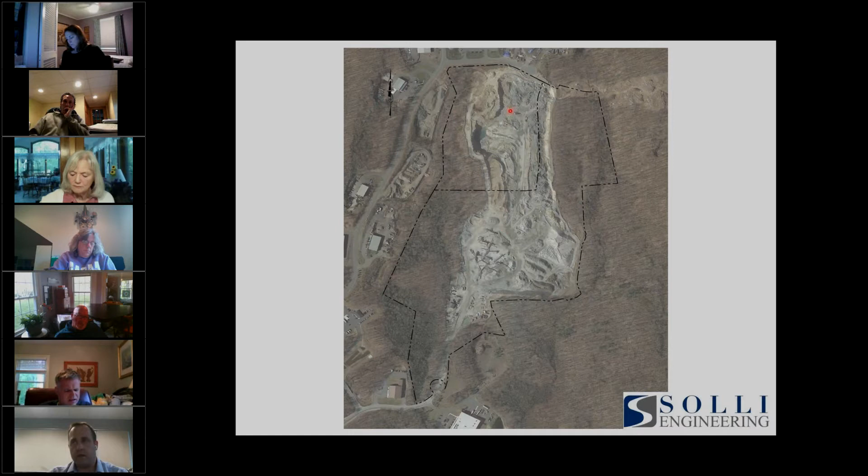So the site has been subject to many past approvals and previous applications. It was originally approved as part of the Pepper Street Business Park, Section 4. That Section 4 re-subdivision was modified recently. But the activity on the site was conducted through a site plan approval which allowed for the construction of 2 large industrial buildings. As the commission's well aware, the activities on the site which were conducted under that approval expanded beyond the scope of what was approved. This commission issued a violation. We came in and reviewed that violation and the activities on the site that transpired. And then we're here tonight to propose a remediation activity to essentially fill in the hole in the area that's been over excavated from the previous approvals and try to restore the watershed to some of the wetlands along the eastern side.

I will say with me here this evening is Bill Kenny, our soil scientist, and also representatives from the applicant team and the property owner. We're hopeful we can keep this presentation succinct, and we're hopeful that this application can be processed in a timely fashion to the best extent practical.

So our application has been modified considerably from the last time we were before you. Some of the issues raised as part of the denial were that the previous application was proposed for regulated activity, and it included the construction of a building. And the concerns were it really should be separated into a remediation application only and not include any other site development aspects. So this plan has been revised to do just that. We aren't proposing the construction of any buildings. We're only proposing to import material and do some grading on the property to essentially get the site flat and stabilized, so it could be used for future development purposes.

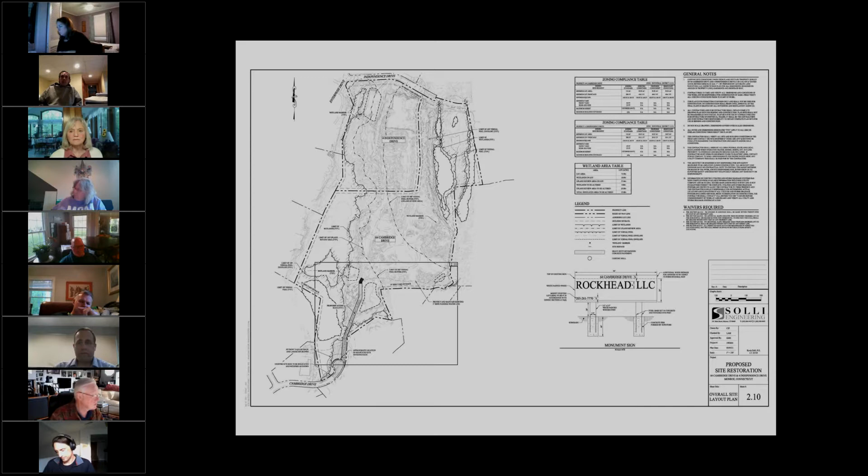Starting at the southern end of the site, we're simply proposing to continue an access drive and a construction entrance. This is actually being done in accordance with previous approvals granted for the Section 4 re-subdivision, which established the cul-de-sac for Cambridge Drive at the southern end of the site. And then the construction of some sedimentation basins and stormwater detention basins, which have been sized and designed to accommodate future potential activity on the property.

From a grading standpoint, we have considerably modified our grading plan from what was previously before you and has been discussed at informal meetings. We are proposing to fill the southern portion of the site, roughly to this location here, to an approximate elevation of 435 to 440, essentially creating a flat level pad, which would extend from this location when you first drive into the property all the way back to this limit here, which would considerably reduce the amount of fill needed to achieve the project's goals.

The northern end of the site on 4 Independence Drive would be filled to a grade of approximately 465, 466, which would allow for a watershed to be recreated to feed into the easterly wetland systems, which is roughly equivalent to the watershed that was previously approved by the Planning and Zoning Commission. In the previous denial letter, there was discussion about an alternative that didn't restore the entirety of that watershed. We believe this application addresses that concern.

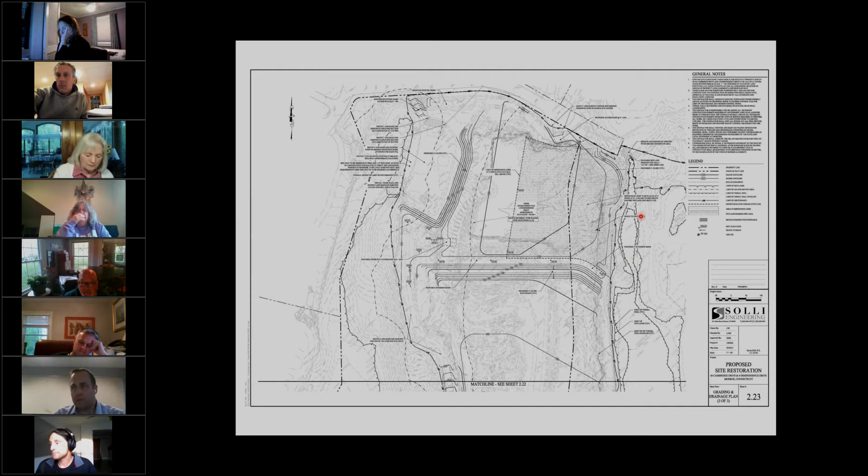Continuing north into the site, as I mentioned, we're just grading this out to create a somewhat level pad, but to make sure there's positive drainage all the way towards the front of the site. And then once you get to the northern edge of the property, the portion of the site closest to Independence Drive will be filled to an elevation that'll allow access from Independence, and then have stormwater drain superficially to the east to provide some watershed restoration, and then a 3-to-1 slope down from this level pad to the lower pad.

As part of our application, we included details for an impervious clay liner, and actually it can either be a clay liner or a 6 mil poly or plastic liner, to ensure that any water that does rain on this area of fill will essentially infiltrate into the ground and then drain along that liner to this wetland edge, along the existing rock face along the eastern side, so that we wouldn't lose any of that water from a watershed standpoint. This was discussed at length, and we feel that is a good way to address that. It'll essentially act as the rock ledge elevation did prior to any site disturbance.

Our soil erosion sediment control plan has been prepared in accordance with the 2002 Soil Erosion Sediment Control Manual. This site is covered under a stormwater general permit for construction activities with the DEEP. It's also covered under an industrial permit for stormwater discharge from industrial activities, also under a permit with the DEEP as well.

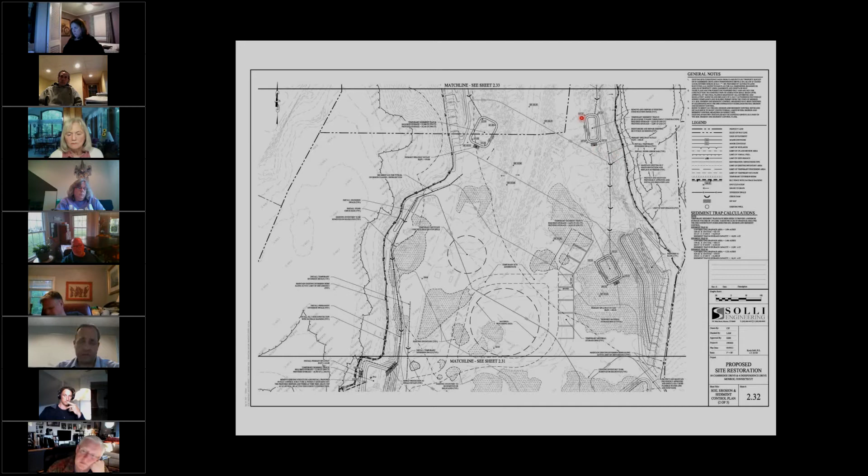As you can see here, we've identified on the SEC plan where the material stockpiling would take place, and how the existing on-site materials would be gathered and then placed. We have a series of sedimentation basins which have been sized in accordance with the SEC manual to ensure there's adequate capacity to collect stormwater runoff and adequate room for sediment to settle out.

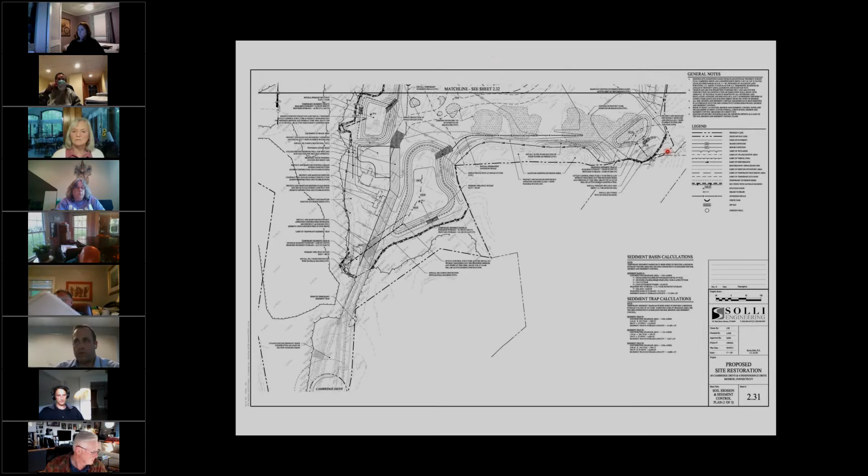The northern portion of the site, as I mentioned before, has the deepest part of the hole. From a dewatering standpoint, we will be proposing for that water to be dewatered into the sedimentation basin in the southeast corner in this location here, so that it doesn't inundate the westerly wetland system or vernal pool, which I think there may have been evidence of in previous years when that water was dewatered into the municipal basin in the northwest corner of the site. So we'll be providing dewatering to this corner to ensure that we don't have any adverse impact to those wetlands or natural resources.

Included in our package is a robust landscape plan, which includes extensive both wetland plantings in specific areas and also upland enhancement areas. Starting on the southern end of the site, we've included, for the Commission's information, some remediation and restoration plantings, which are approved as part of the Section 4 re-subdivision at the southern end of the site where Cambridge Drive cul-de-sac will be reestablished.

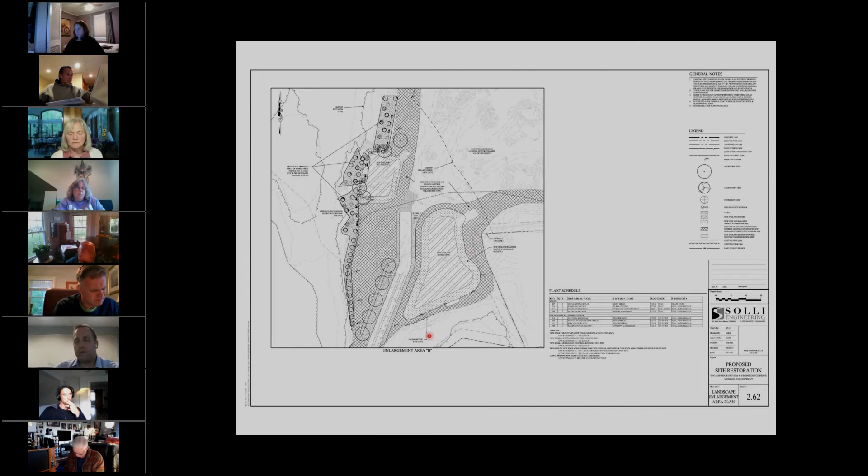As you drive north into the site, our access driveway in this location here, we have extensive wetland plantings and mitigation areas and upland enhancement areas along the eastern edge of the site. Included in our package is extensive wetland markers along the boundary of the property to ensure that it's very clear where the wetlands are, the natural resources are, to protect against any future disturbance in areas where we don't want that disturbed. We have seeding mixes in the detention basins and sedimentation basins proposed on either end of the driveway.

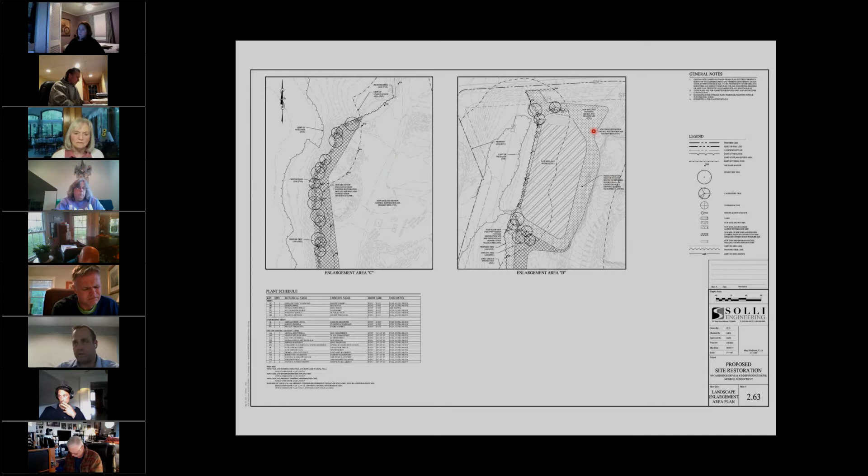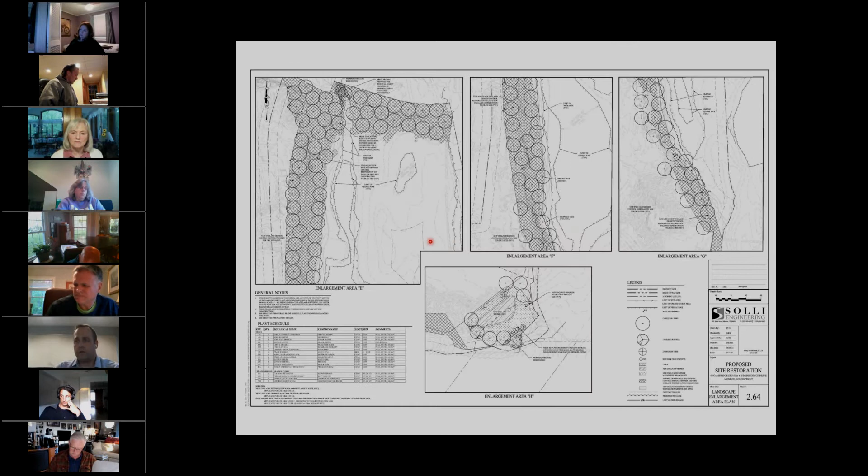As you continue to drive north along the western side of the property, we have additional plantings and upland enhancement plantings along the eastern edge of the wetlands. And then in the municipal detention basin, which is located in the northwest corner of the property, additional plantings, both from a seeding and also from a plant standpoint, are proposed surrounding that basin. Going back to, and sorry to jump around, but in the southeast corner of the site, our sedimentation basin and stormwater basin has been designed to also provide for some additional wetland plants and upland enhancement areas.

We've also identified a small area in the northeast corner where we're proposing to actually recreate some additional wetland soils with additional wetland plantings in this corner here. And then as you continue further north along that easterly wetland edge, we've provided some considerable upland enhancement plantings, upgradient from the wetlands, and then some extensive tree cover to restore the previously cleared area north of the wetlands and Vernal Pool in this location here. And then those buffer plantings continue as you go from north to south along that wetland edge, and then additionally through this area, bringing it all the way back to the other corner.

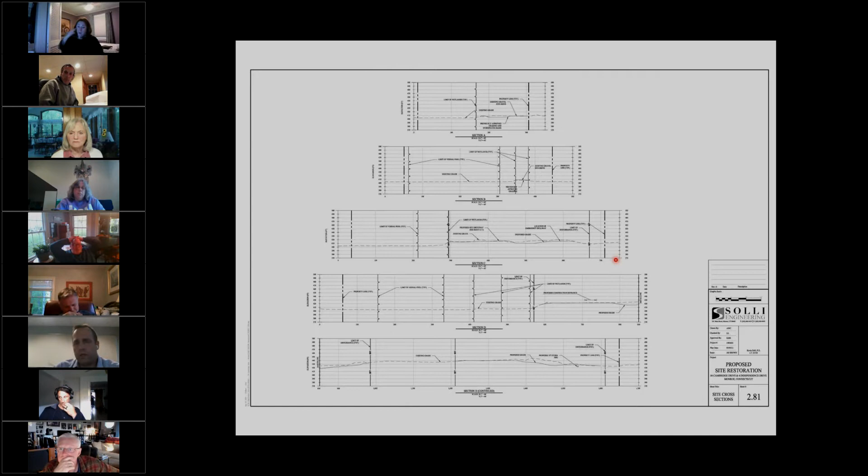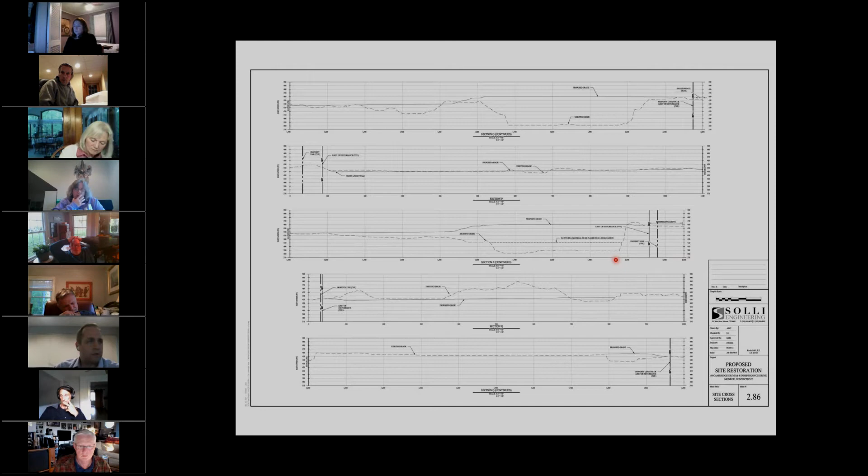We have in our package sections through the property which show the existing grades and the proposed grades. This is actually more of a requirement for planning and zoning with their fill permit, but it is something that we had prepared. What I wanted to do for the commission's benefit is to show some 3D models, which may be helpful in the commission understanding what the proposed grading will result in from a future condition standpoint. So this obviously shows our proposed grading activities.

One other consideration that we've included in our application is a proposed lot line revision, which will result in moving the existing lot line between 64 Cambridge Drive and 4 Independence Drive from this location here, moving that line a little bit from south to north to bring that line across the property here so that it essentially bifurcates the upper pad and the lower pad, and then have that line continue south so that the entire limit of that easterly wetland system will be contained on 4 Independence Drive, so that the watershed that's being restored is entirely on 4 Independence Drive, and the wetlands on this side are also on that property.

So this will allow for essentially 2 properties, 4 Independence at that upper pad elevation with access off of Independence Drive, and then 64 Cambridge Drive developed to that lower pad elevation, so that they can be developed independently, but the restoration activities associated with this easterly wetland system are all fully contained on one property. We know that was a concern discussed during the previous hearings.

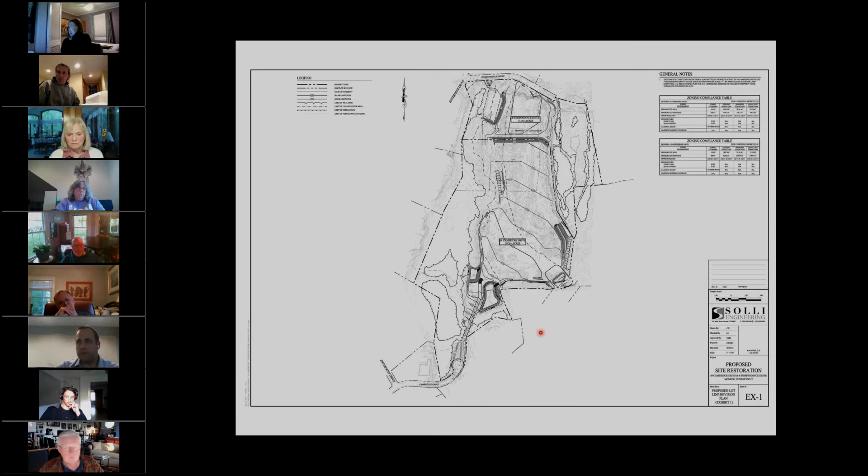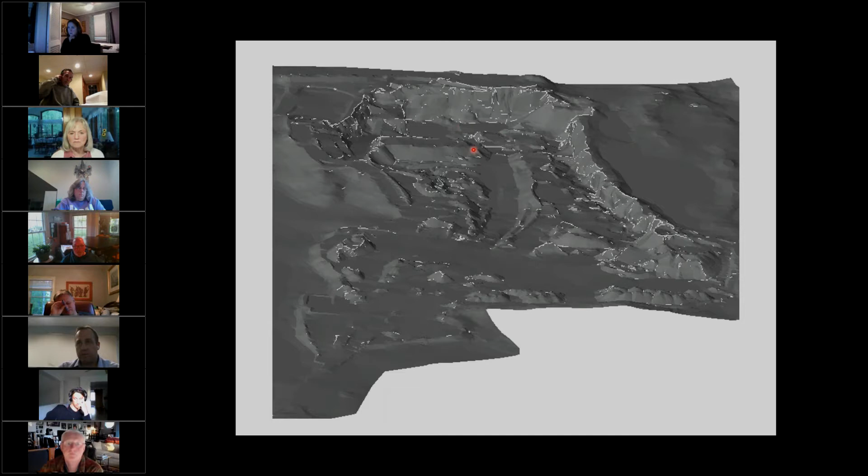And then I wanted to show some models. I think these might be a little bit hard to see, but imagine you're up in the air roughly here, looking to the north towards Independence Drive. Up along the eastern side, you can see this would be that easterly wetland system. You can see the face of the rock excavation, and you can see how the grades drop down. Independence Drive would be roughly in this location here. You can see that face as it drops down from higher elevation to the bottom of the excavation here. You can see some stockpiles of materials which have been created over the years, and just how those grades work.

And then from a proposed condition, we do have a model which shows how this will be cleaned up, and roughly we're going to be able to create a uniform grade running from south to north, all the way to that proposed change in pad elevation with the uniform slope up to that upper pad elevation.

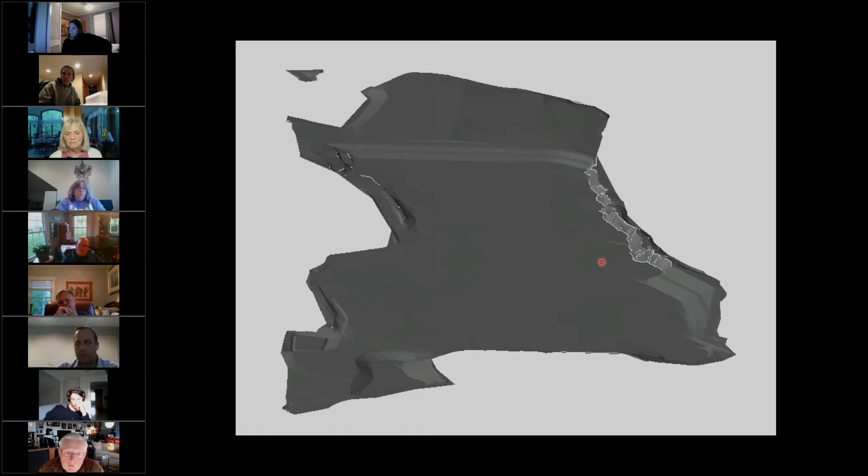And then again, this will allow for surface water flow from west to east to fill into that easterly wetland system here. You can see the height of that easterly rock face has been reduced substantially from its current condition as we fill in this lower portion of the site up to that lower pad elevation.

You can even see the depressions for the detention basins as we've proposed it along the southern end of the site and the driveway coming right through the middle, to really create an area that can clean up something that's needed to be addressed. And again, we're here with the property owner with all intentions to address that. And I think we've been trying to be open and honest and work with the commission in earnest to get this property to be addressed.

With that, I guess I'll pass it over to Bill Kenny. Included in our application materials was an updated report from Bill's office. He's been out to the site a couple times, and I wanted to give him a chance to address the commission to talk about his review of our proposed plans and his assessment on the wetlands and how this activity will prove to be a net benefit for the property. And then we're happy to answer any questions the commission may have.

Bill? Yes, good evening. My name is Bill Kenny. I'm the principal of William Kenny Associates in Fairfield. I am a professional wetland scientist, soil scientist, and landscape architect. We continue to help with this project and are happy to be here for the proposed remediation work.

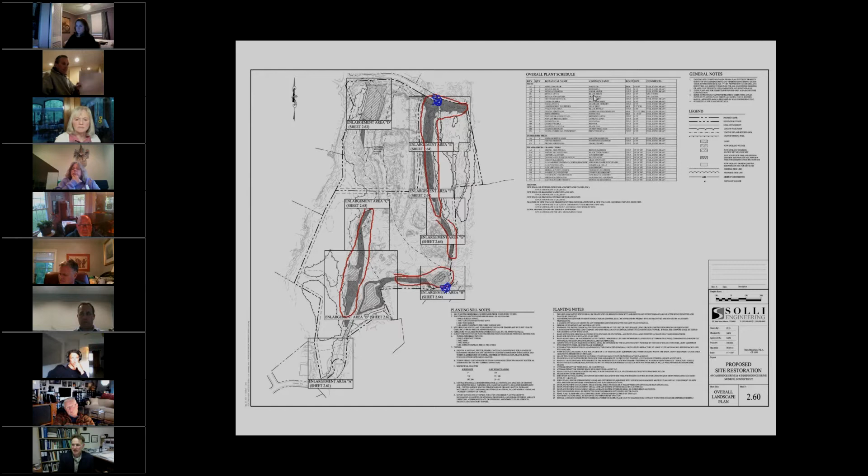Thanks, Bill. I believe that Keith Romano came to the meeting at 7:25. Am I correct on that, Keith? Oh, yeah, around that time. It's around 7:20, 7:25. 7:22, actually. 7:22? Okay. Cool, I didn't even pay attention. Keith, I wrote you down. If you want to take over, you're welcome to do so. No, go ahead, Lois. You could keep going. But I do have a question. I'll start with a question, though.

Sure. First of all, let me ask, how much of the presentation did I miss on this application? Not very much, I don't believe. Kevin did an overview, his normal overview. And at what point did you come in? Kevin was speaking. It seemed like it was early on. I know I wasn't there for the actual opening of it. I guess we'll go back and check the record afterwards or the tape. Keith, I think when I saw your screen pop up, I had just really started talking about some of the history to refresh the commission's memory, although I know it's probably very clear in everyone's mind, and the length of the discussions, and that what we brought before you tonight, we think adequately addresses a lot of the concerns raised from the previous application. And then we just started to run through it. I don't think you missed very much.

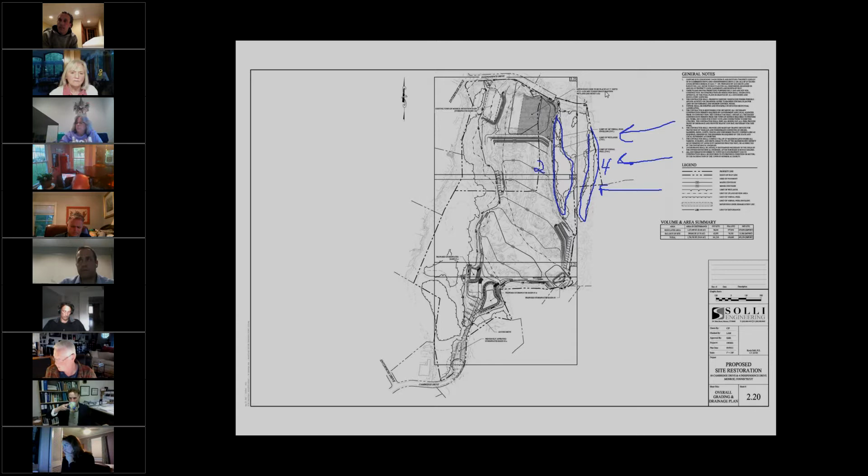Ross, you said you had a second question? I did. The planting plan that's going to be in the impervious liner area. Are the trees, like, what is it? You said it's going to be a 3-foot depth of material on top of the impervious liner. So if you're going to have some large trees planted in that area, how are the roots going to deal with that?

The vast majority of your roots, when you go out in the forest and dig a hole, particularly the larger ones, they're within the top 2 or 3 feet of the soil surface, and they really spread primarily horizontally. You'll get some smaller roots that'll go deeper, but it's quite similar to conditions that existed before, where there was bedrock close to the surface, so a very similar situation for growing. Okay, thank you.

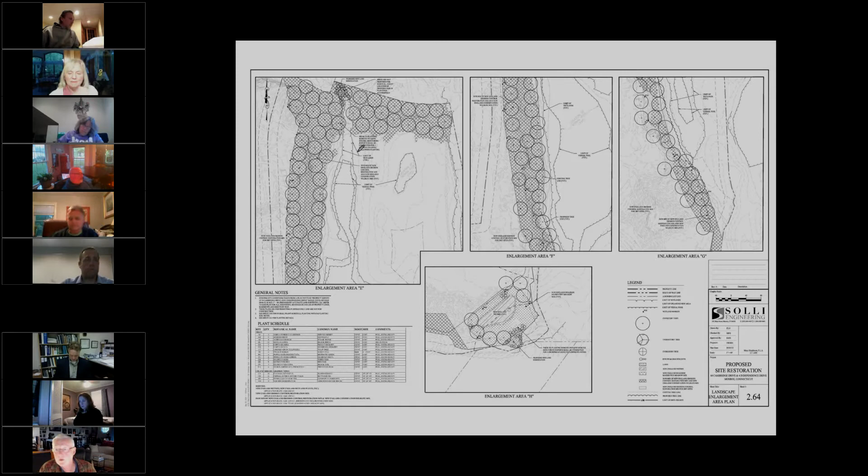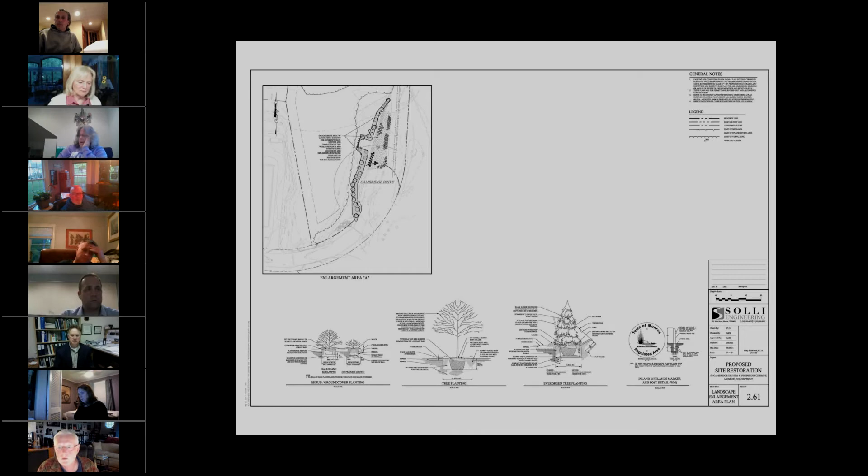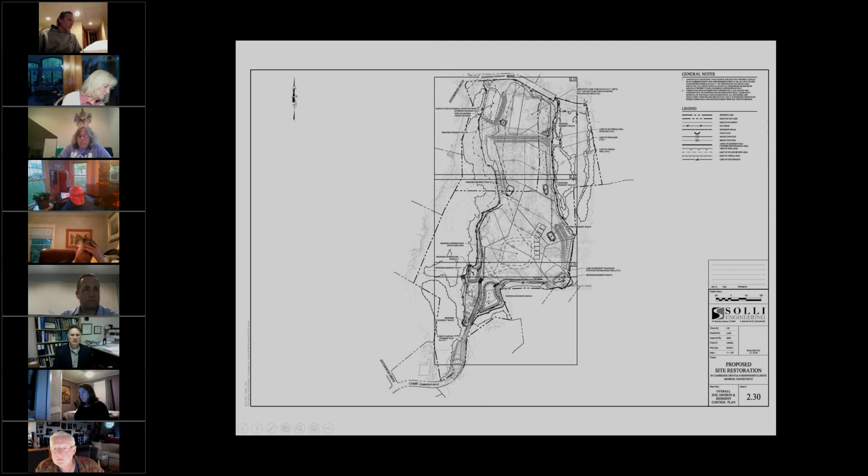DJ, do you have any questions? Yes, I do. Kevin, if you could go back to the previous slide there, the 2.20. Okay. Sorry, one second. Here we go. That's the one.

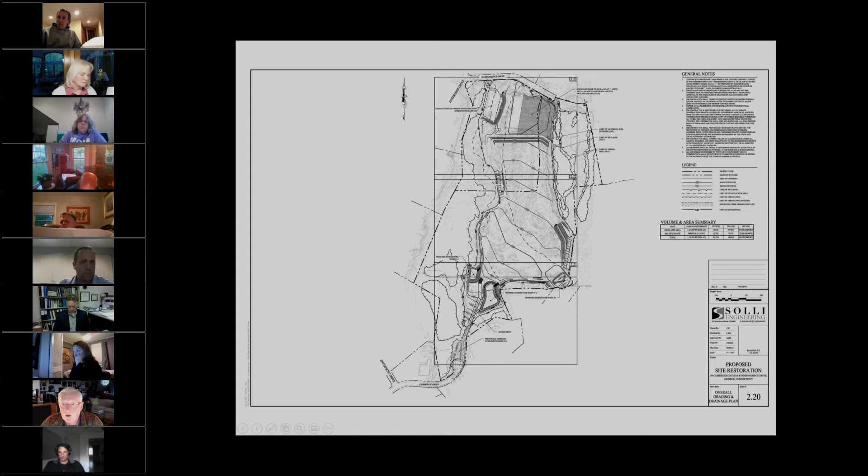Okay. So up there at the top, around that impervious liner, it appears the liner crosses the property boundary. Is that correct? That property boundary is running vertically through the impervious liner? It crosses the current configuration of the property line. And let me pull up, because I think it's a perfect time to do that. This is our proposed lot line revision plan, which moves this property line to come in this configuration.

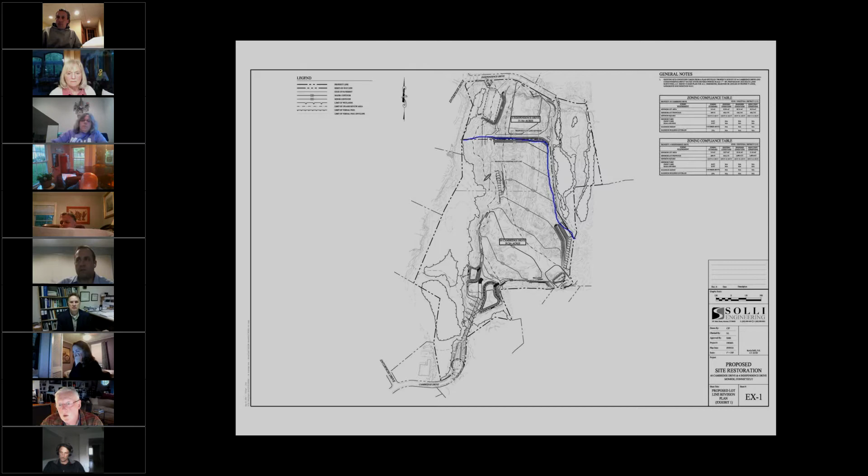So you can see very light, and I'm going to trace it in a different color. This is the existing property line, which I'm drawing now in green. The blue line represents our proposed property line. So the entirety of this upper pad area will be entirely contained within 4 Independence Drive, so that liner will now be located entirely on 4 Independence. Circle the rest of the property for everyone. So all of the restoration goes with 64 Cambridge.

Well, the blue is 4 Independence. Oh, okay. So all of these wetlands and all the grading will all be established on 4 Independence, and 64 Cambridge will essentially be the lower pad area. But all the water for the restoration of 4 Independence comes from 64 Cambridge? No, the surface water is coming from that. Oh, the well pumping I'm talking about. Yes, the well pumping does come from 64 Cambridge.

Okay, so even if you separate the properties, there's still a huge interdependence for the restoration between the two properties. One thing that we could do to address that: we wanted to get the rehydration started immediately, so we wanted to use the existing well that was there. We could incorporate into this application, if it would please the commission, another well up here on 4 Independence and pump from this well in the future. I think the applicant would be happy to accept that as a change to the plan, so it's all entirely captured from 4 Independence

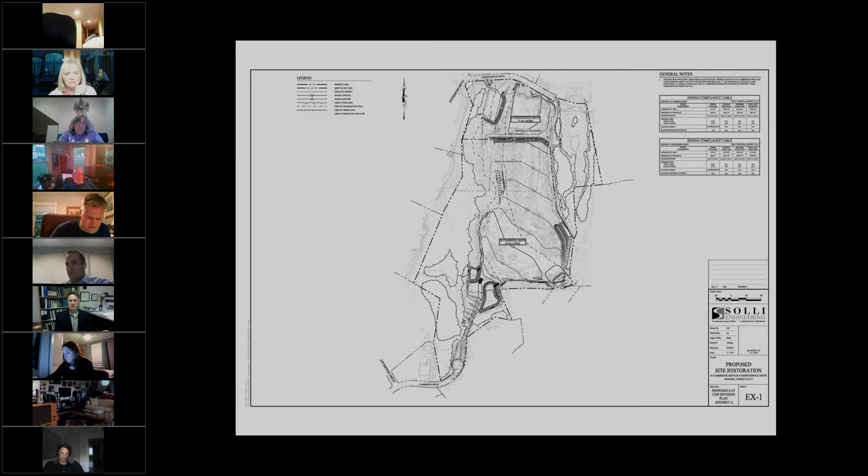Okay. I got a question about your upper pad there you're making. So you're going to be filling different materials, maybe to fill within the vernal pool envelope, and this is above the liner, and then you fill outside the vernal pool envelope, but still graded towards the vernal pool. Can you show me where that vernal pool envelope is on the drawings?

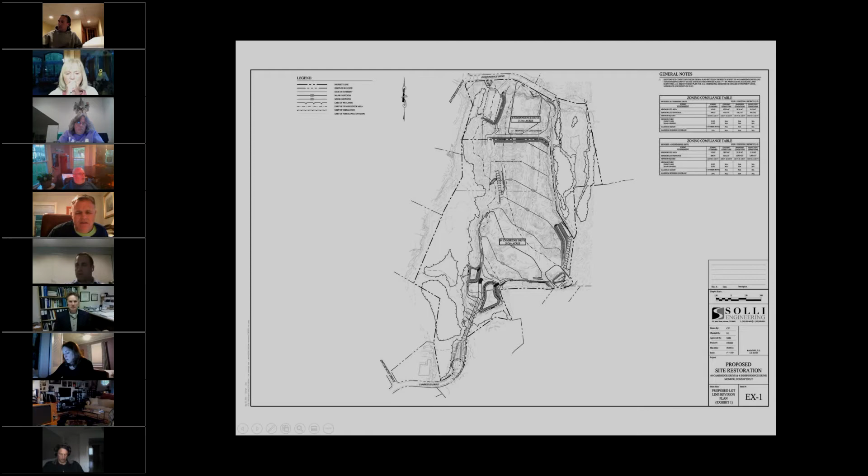I can. Let me go to our close-up in that area. How we're defining that vernal pool envelope? Sure. The vernal pool envelope is essentially a 100-foot buffer from the limits of the vernal pool. These vernal pools were flagged back in 2014, so obviously nature has changed, but we've used that same envelope. And that roughly follows this location here.

Now, in previous applications, we had proposed, obviously, to fully restore it to the southern end, but since the change, we're obviously only proposing to do that filling through this limit here. But that's roughly the 100-foot buffer which represents the vernal pool envelope from this vernal pool. Okay, so I didn't see that notified anywhere that you were considering the vernal pool envelope at 100 feet.

Then the other thing you've got is you also talked about a 6 mil liner as opposed to, I guess, a 6-inch thick clay. Yeah, our initial application said it could be either or. I think during the last hearing, we received some feedback it would prefer not to be clay. We think either can be successfully implemented here. But it would be that.

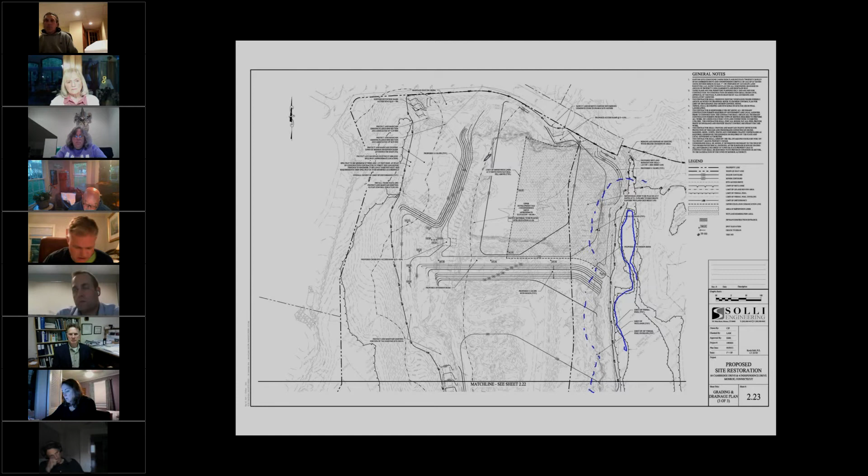Then the next question was, since this is going to be a future pad site, with buildings and asphalt and curbing and drainage and septic systems on that pad site, can you explain how you're going to treat the stormwater runoff that's heading to that vernal pool in the future, if this is permitted, in either 3 feet of natural fill or 6 feet of clean fill? To me, you're going to need more depth to create a pond or something, and piping. I just don't understand at this point. And I don't necessarily expect you to answer right now. It's just the thought.

Well, ultimately, we're establishing the limits of this impervious liner, but in a future development application, a portion of the surface will be impervious. Whether it's roof or pavement or parking lot, the water that lands on those impervious surfaces will be collected and run through a treatment train to provide water quality treatment, and then likely through a hydrodynamic separator or an above ground basin to ensure we're meeting the requirements of the water quality manual.

So, in theory, if we have a development pad with a building facing Independence Drive, we would collect all that and route it through a stormwater treatment train with deep sumps, so all that area would be collected and treated. That may be attenuated either through underground detention or an above ground basin. All this actually drains to the Great Pine Swamp and then runs to the north, so we don't have an attenuation requirement because the swamp itself does that attenuation. From a septic standpoint, the septic soils would be over on this side, where there's been some septic testing with the sanitarian. But all this area could be collected and treated.

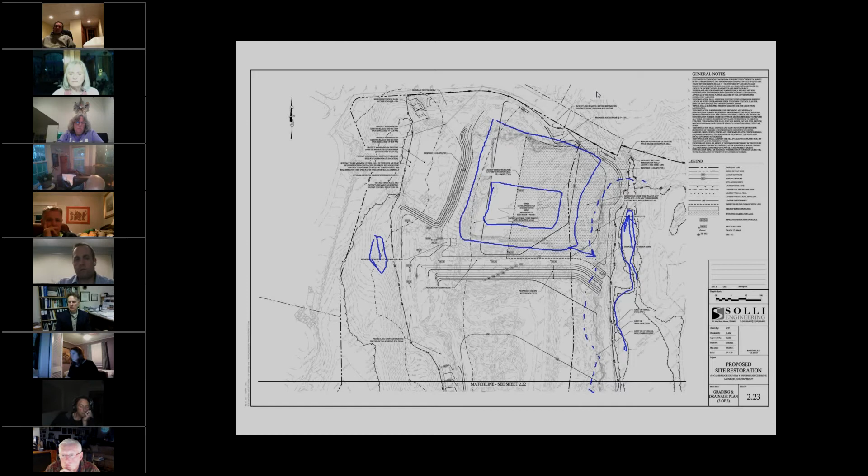Yeah, and it's treated, because I don't want to have an argument in a couple of years when you've got a developer and we're saying, you can't make the site work, we have to dig down and relocate the liner and do all this. Sure. Yep. Okay. We can provide that. Okay, thank you. That's good, Lois, for me for now.

Okay, thank you. Clark, have you any questions? No questions. Okay, guess who's next? You are. As usual, I have a whole mess of questions.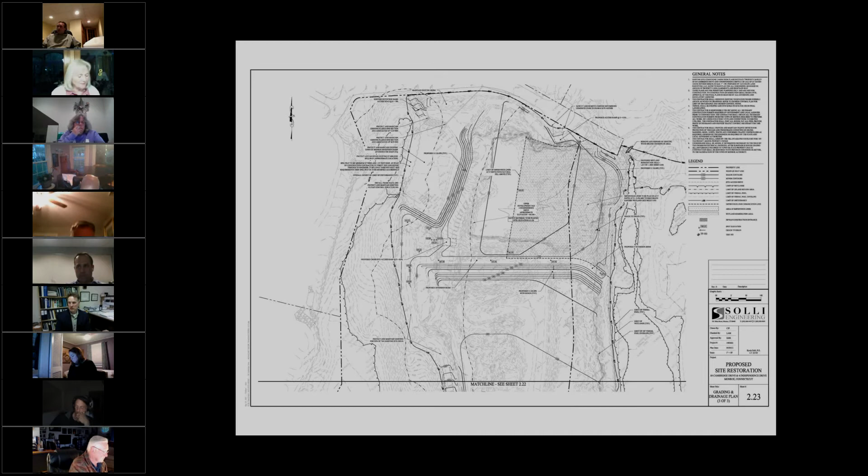The new proposed activity and the new proposed lot lines that you brought to us this time are quite a bit different than the ones you showed us in the concept when we brought it to the informal discussion, and the east-west line that transects has been brought toward Independence Drive significantly.

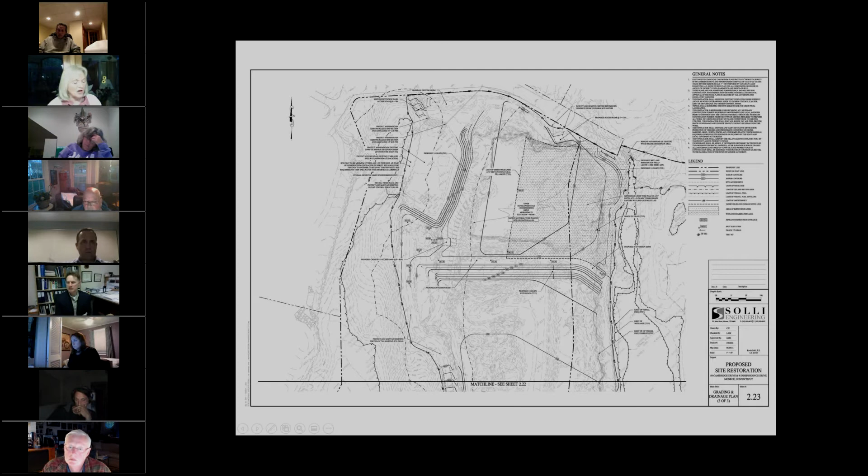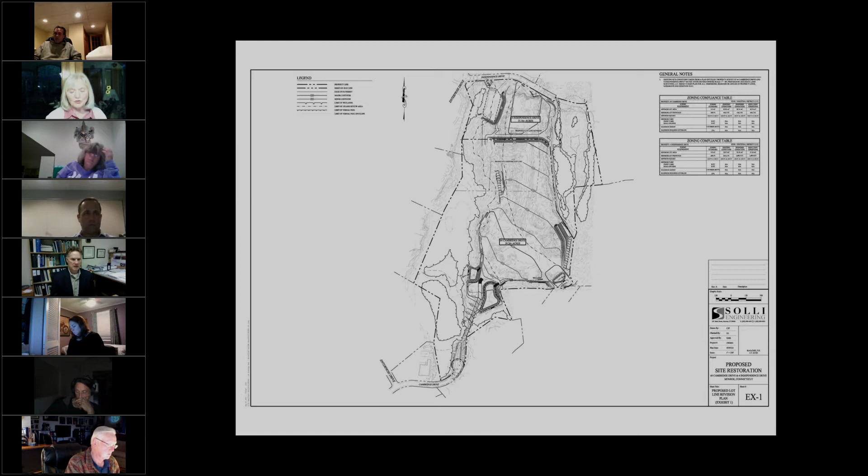The first question I have for Bill Kenny is, Vernal Pool 2 is in the larger section of wetlands, not the one that's directly east of the liner on Independence. It's south of that, am I correct? That's correct. So there is no vernal pool that's being directly fed by this runoff.

No, there's a small area of breeding that was found just on the north end where Kevin was just starting to outline. But that's never been identified as a vernal pool before. I believe it was by Michael Klein. It was flagged as a vernal pool. But it was never in any of the previous applications or discussions. Vernal Pool 2 was always in the northern section.

I'm sorry, I keep saying that. In the southern section, the larger of the two. And Vernal Pool 3 is the little isolated one in the far east. My concern is that there's not going to be any runoff going to the majority of that wetland, which is actually south of the area where you're proposing this drainage pattern. I just want to put that aside as a concern for now, and we'll probably revisit that at another time. Are you planning on this pumping being a permanent thing?

Oh, this plan, so I'm looking at Exhibit 1. It's just called EX1. The lot line, the elevations don't match with the elevations on. I'll be honest, I got home late yesterday afternoon. I have not had a lot of time to spend on this application, which was in my mailbox when I got home yesterday. So I need more time, obviously. But there seems to be a little bit of a discrepancy in elevations in one set of plans to another. I just wanted to mention that. Yeah, please, once you have a chance to review, please let us know if the current application has any plans that are inconsistent. Will do.

Okay. At what point in the program would you be revising the lot lines? We're proposing it as part of this application. We propose it as part of our planning and zoning fill permit application, provided that the Planning and Zoning Commission approves our fill permit. We would then file that lot line revision on the land records prior to the commencement of all the activities. Okay, and you're waiting for approval from us before you go to P&Z? Yes, we're trying to avoid long protracted discussions in two commissions at the same time. We'd like to go to the Planning and Zoning Commission with something that's been endorsed by this commission. Okay.

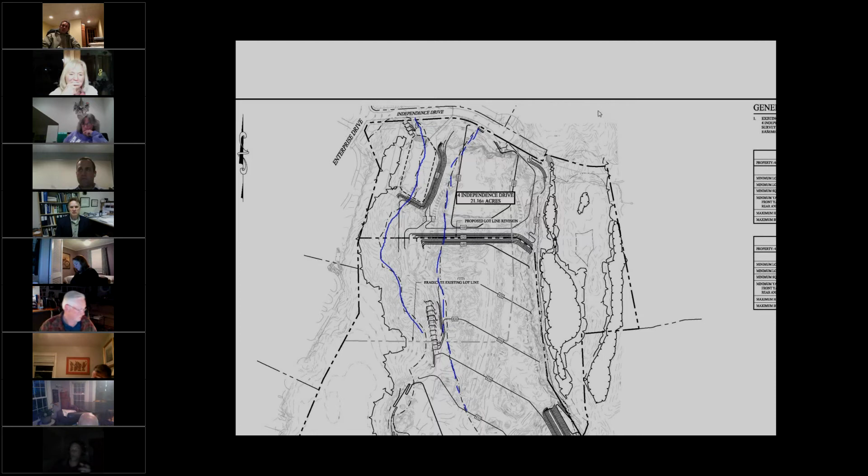Well, we probably end up doing something with solar powered, because essentially it's an irrigation operation. Yeah. And we've actually done some sourcing of some pumps that could be fed by solar power. So we wouldn't have to run permanent power to it, and it could be served that way. Okay, because I was also thinking if he were to put it there, for long-term purposes, wouldn't it make more sense?

And maybe I'm just thinking too much, but to have it closer to Independence Drive for servicing and whatnot. Because how are you going to get to it later on if you had to do a service to it? Not that I think this thing's going to have to run forever, but if that's what you're proposing, I'm just thinking to myself, that's pretty damn far away if you have a split up property and they've got to get to it.

And also not to mention, it's basically an irrigation system, like you said. In the future, why wouldn't you maybe tie it into city water and just not worry about a pump? We could certainly look at that. I think we'd have to, and that's something that could actually get incorporated into any future site development here. Yeah. On 4 Independence, that could actually be captured in. I think that's actually a great suggestion.

We could work that into the irrigation system and then run those continuous lines down along the property line to further hydrate that southern end if it's needed. I think the beauty of this is we have flexibility to consider that. But we're incorporating those remediation methods in this application now, and we can always revisit and adjust as needed. But I think that's a great suggestion. Okay, that's all.

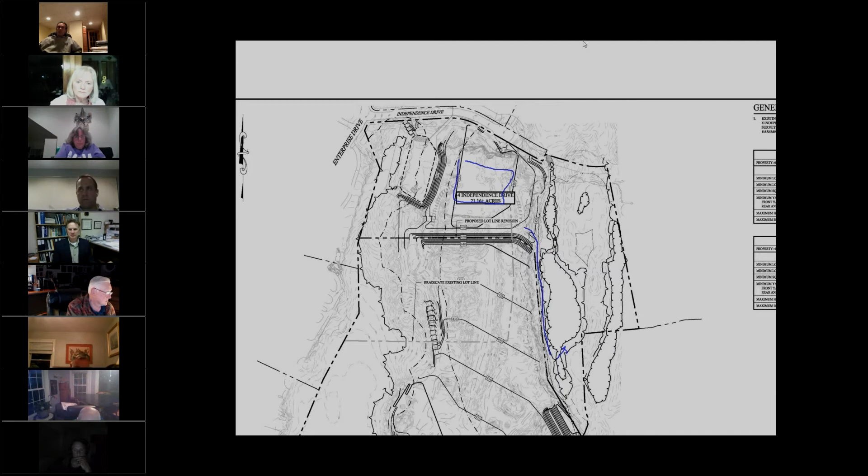Hey, Denise, do you have any comments? No, I'm gonna stay out of this right now, because any changes I won't be around for. Okay, thank you. I mean, a lot of the questions I had, you asked, some of the other commissioners asked. Okie dokie. Okay, any further questions from the commission? Anything? Ross? No, okay. DJ's good, all right, looks like everybody's good.

So I would like to table this, not application, this submission to the next meeting, pending. Is Scott, the engineer, going to weigh in on this? He has not had a chance to review this yet. There was a lot of information. I'm sure he'll have something by the next meeting, but he hasn't had a chance as of yet. I certainly understand that. Okay, all right, so pending. We'll continue to the next meeting. I would like to table this to the next meeting. Okay. Thank you, everybody. Thank you.

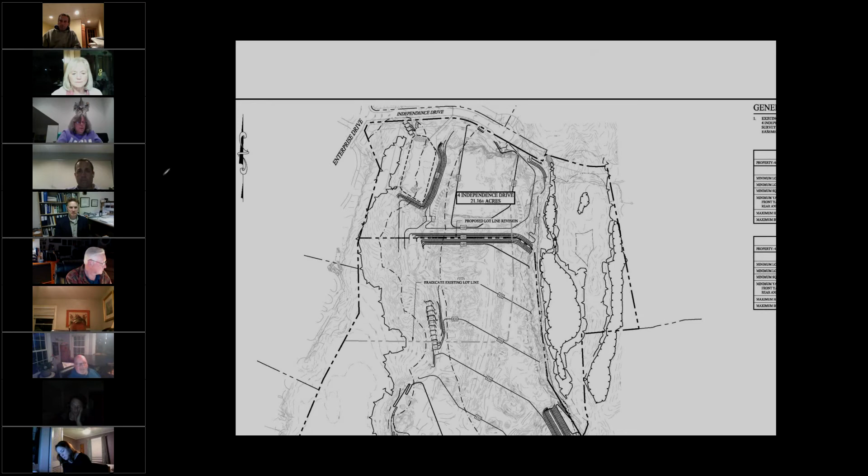Okay, moving on. Next, we have several callers, Lois. I don't know if any of them might have been for the one that we skipped over. Oh, and you know what? I didn't do public participation. Well, it wasn't a public hearing. It was a remediation submission. No, I don't mean on the submission. I mean in general. Oh, at the beginning of the meeting. It wasn't on my cheat sheet, so I forgot all about it. Should I do it now?

Yeah. Keith, you want to take over? You do so much. No, I'm fine. I had a long day of racing around a racetrack. I'm exhausted. Is that why you're in the dark? We're completely in the dark. Oh, the light, turn the lights on. Oh. There's just this big dark mark.

Okay, is there any member of the public that would like to speak on wetlands related matters? I'm not sure if there's restrictions on that or not, Donna. I don't know that there's restrictions. We don't have any public hearings, so I guess we don't have to worry about that. Okay, is there any member of the public that would like to speak on a wetlands related matter? Oh, Pauline. Caller 8, you have turned on. Would you like to speak? No, I don't think so. I'm going to mute them.

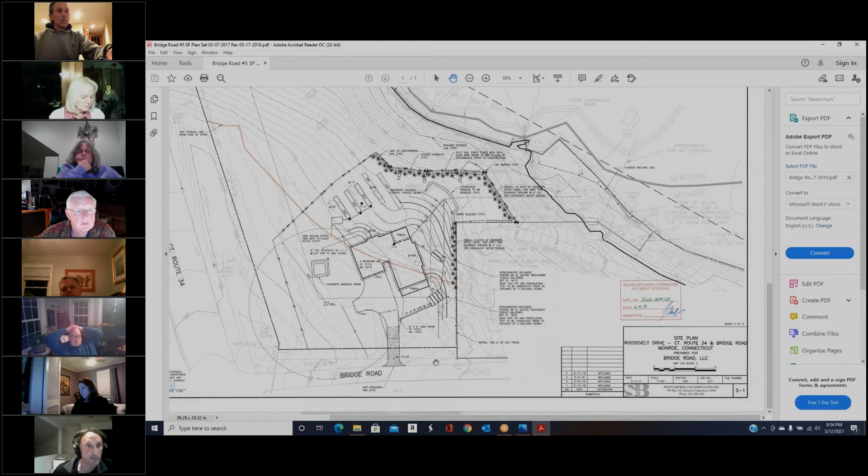Okay, Denise, I would recommend, there's no issue planting those over the reserve septic system. Because if they ever end up having to use it, they'll just remove what's in their way. But they weren't necessarily going to do lawn all the way up there. They don't have to do lawn. You said your concern was to have them relocated above the reserve septic system.

So where the trees are now, this drawing had those plants against the split rail fence. They're going to have to be put out like 10 feet away from the split rail fence or more, and navigate in between all those mature trees. But I thought you said you were concerned about having them relocated above the reserve septic. Well, yeah, because it's going to push, if you look at this drawing. Show me with the mouse or something.

Okay, can you see my mouse? Yes, you can, okay. So here's the reserve system. There's all mature trees here. That's the reserve system? To me, your mouse is right underneath convert. It's not on the actual drawing. Then you're not seeing my mouse. Whose mouse is it? It's not mine. It might be Donna's. Nope, now I must have it. You have a hand. Before it was an arrow. Okay, go ahead. Sorry, do it again.

So here's the reserve system. Trees are all the way out in this area, mature trees. So if he puts planting, it's gonna be like way up here.

And he doesn't want that. He wants to naturalize it, but according to the plan, this is what the approved plan is. I don't understand how we could put 36 trees all along here based on the photos that we showed earlier with all those mature trees. But you're saying to keep them on the site, to actually have them installed somewhere, so it's a change of location, so to speak, but still meeting the requirements to have these plants on site. Yeah, right.

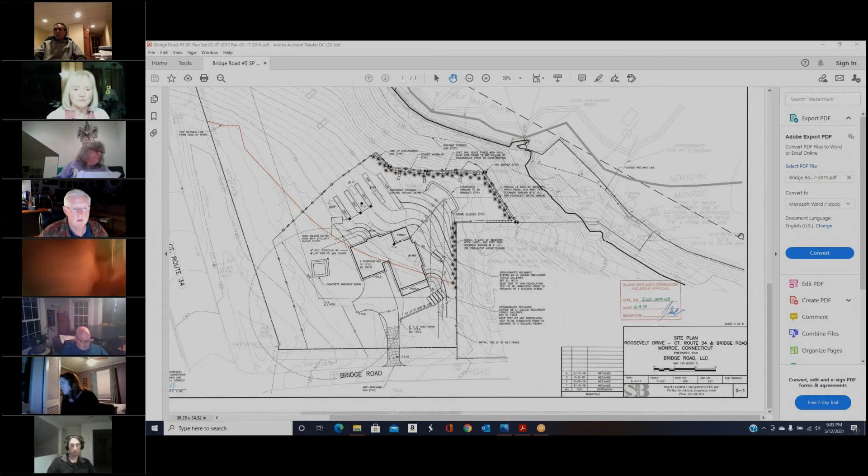Okay. Do we want to just make sure that one of the other callers is not the one for 118 Elm Street? Sure. I'll unmute everyone. Are any of the callers that are online right now for 118 Elm Street? If so, please start speaking. Nobody's speaking. Okay, and then there's the Microsoft account and an H. Is either of them the person we're looking for? They could unmute themselves theoretically. Yeah. And also identify themselves so we know who they are and if they apply to anything else going on.

They've muted themselves, so I'm not. Okay, so I guess you can use the other way then. I will take care of it the other way. Okay, thank you. All right. Want to give them a last opportunity. Thank you. Thank you for remembering. Okay.

Deliberation on completed hearings, there are none. Agent approvals, IAA 2021-16, 90 Longview Drive. I'll let you take over for that. Me? This whole section, yeah. Okay. 90 Longview Drive, it's an installation of an in-ground pool. Item 15, permitted uses as of right, IPU 2018-01, Department of Public Works, road repair, replacement, and general maintenance. IW regulation section 4.2C, expiration date March 28, 2023. IPU 2021-07, 20 Sherrill Drive, the removal of 4 diseased trees. Okay. That's it for now.

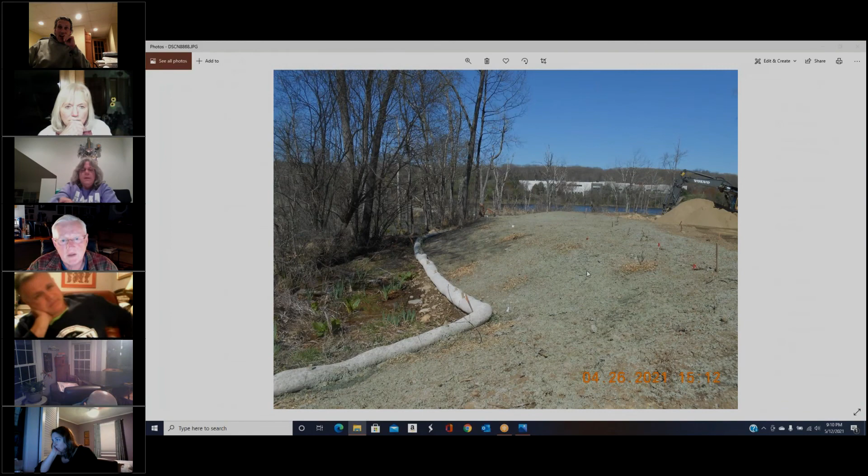I basically told them I think that they should ask the commission to take a look themselves in the field to see their thoughts on this, but the letter just came saying that they felt they were complete and they're looking to have it approved and accepted. So a question, Denise? Yeah. Lois and I happened to be out there today looking at the other side, and it appears there's something sprayed over the topsoil. Is there a seeding of the soil around those plants? That was a seeding that they put on. I believe it must be the conservation mix.

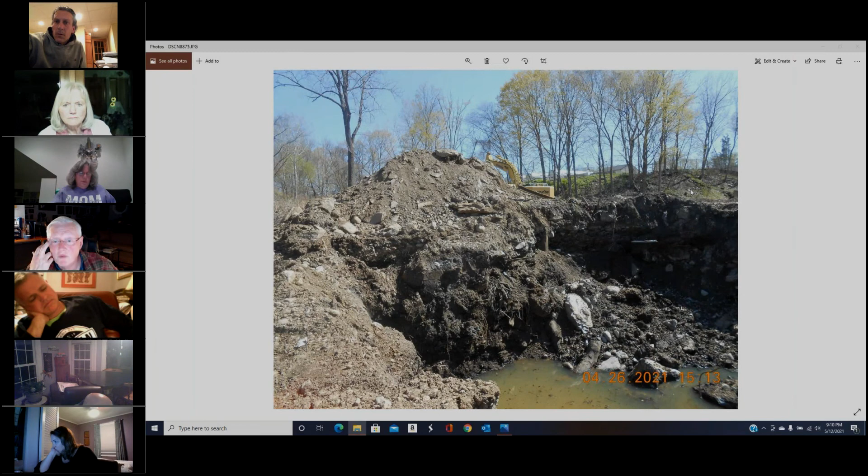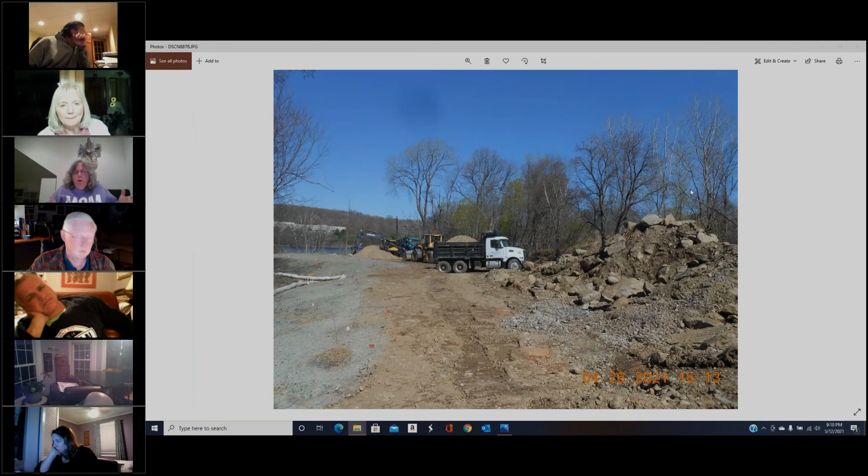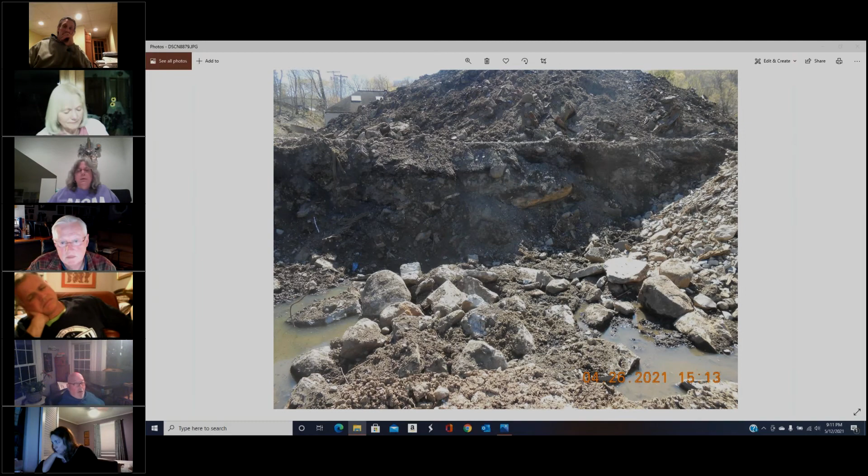Do you know how recently that was done? That was done at the time that I was told that the plantings were done. So that's probably within the past couple weeks. Let's see, the pictures are April 26th. So that was done April 26th, roughly. Okay. Yeah, I think from what we saw visually today, the plantings were barely noticeable in the soil. That was my problem. That's why I couldn't tell what species was which, and I couldn't really visually say, yes, I could count 129 plants or more. And that's where I'm kind of having my dilemma, I guess we'll say.

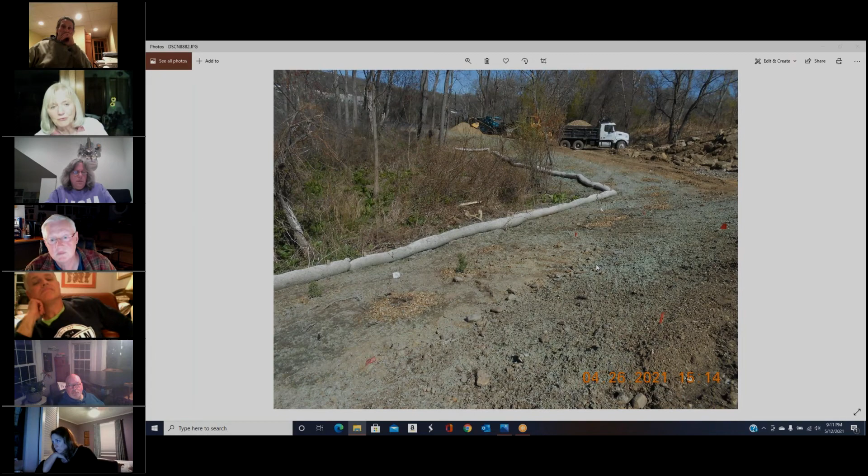Understandable. It doesn't look like any of the conservation mix has grown. There was absolutely no sign of life within that gray matter. Really? Nothing. So I don't know how long it should take to grow, but there was an occasional weed popping up through the dirt that was probably naturally occurring. But the gray stuff is not growing. So if it was done, that's just a little over 2 weeks now. I don't know how long it takes either to germinate. I'm just looking at a calendar. If the 26th is when the photos were done, we're just a little over 2 weeks.

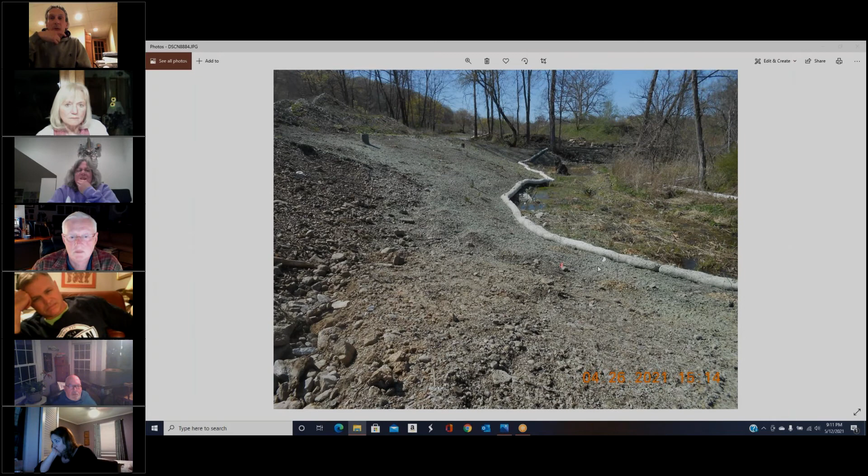It's very, very cold. Nighttime temperatures, crazy. They're low 40s. Even my plants are having some trouble growing a little bit, but I just hope that the cold weather hasn't affected it, Ross. I don't think so. I'm sure it'll come up. It's just a very early, very slow season. I think it'll be fine. It looks like there's some kind of an emulsifier in the mix, something that's going to make it stick to the ground. I really don't think it's going to be a problem.

I do have a problem with the size of the plants. I mean, usually they come to us and they tell us, I can't get these, I can get these. They told me that they couldn't find everything, and so I agreed to let them go 3 to 4 foot trees instead of 6 foot trees. But they don't look like 3 to 4 foot trees. Inches. They were teeny tiny.

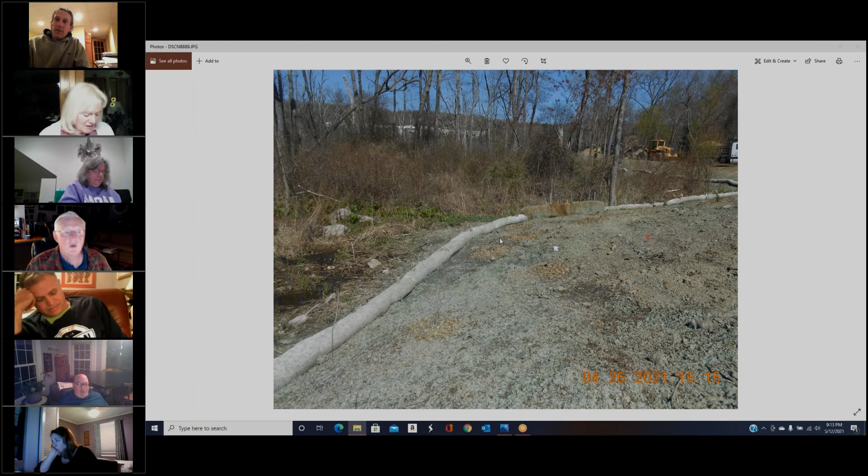So they're asking for approval at this point? Yeah, you should have it in your packet. It says, in accordance with application IWC 2019-12R, we've completed the required remediation as per IWC direction and Solli Engineering plans. We're requesting certification by the commission that the work was completed in an acceptable and satisfactory manner.

Please note that due to IWC requirements to have the work completed mid-April at the beginning of the growing season, some plants and trees were less than optimal size. In lieu of exact specified size, which the plants will grow into over time, we have increased the quantity of planting by more than 50%. This was discussed and approved by IWC staff. A copy of the planting as-built plan and legend is attached.

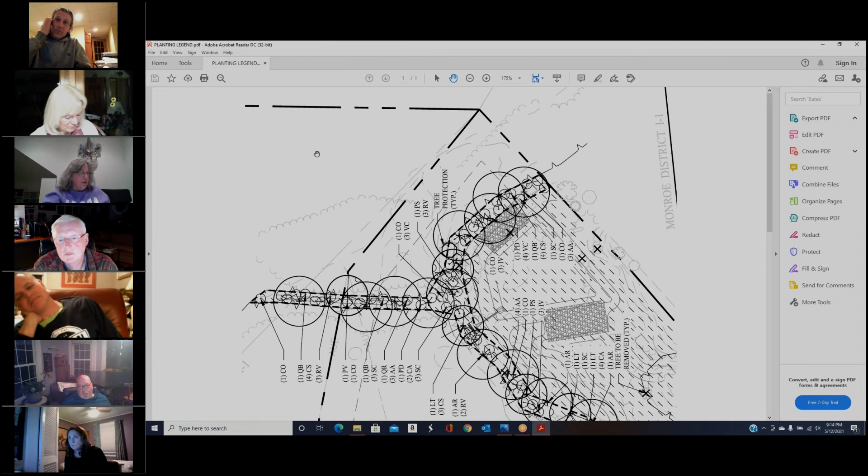We trust that the commission's aware of the extensive amount of work that went into this remediation effort and the care in which it was completed. We're committed to protecting Monroe's wetlands and waterways and remain available to the commission for inspection tours or to answer any questions. But, well, maybe an inspection tour is in order.

And that's why I felt, but I don't have my email, but if I went further back, the discussion was 3 to 4 foot trees. I didn't go to you because I felt 3 to 4 foot trees was still fine for the timing. Yeah, so that's the original plan, and then there should be one marked up with red and orange, which is what was provided to me as the as-built.

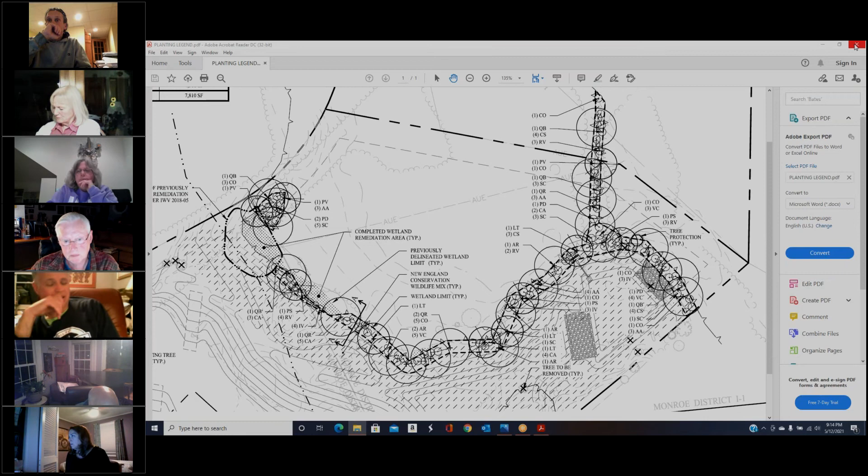If we have something that looks kind of like this, I would take the developer out there and walk the site and say, show me the trees, and they're not the right size, and see what they say. Maybe they count differently than you do. Yeah, I would say certainly we couldn't approve it at this point. Maybe the trees need a little more time, but I'd say they're struggling to meet what they said they did.

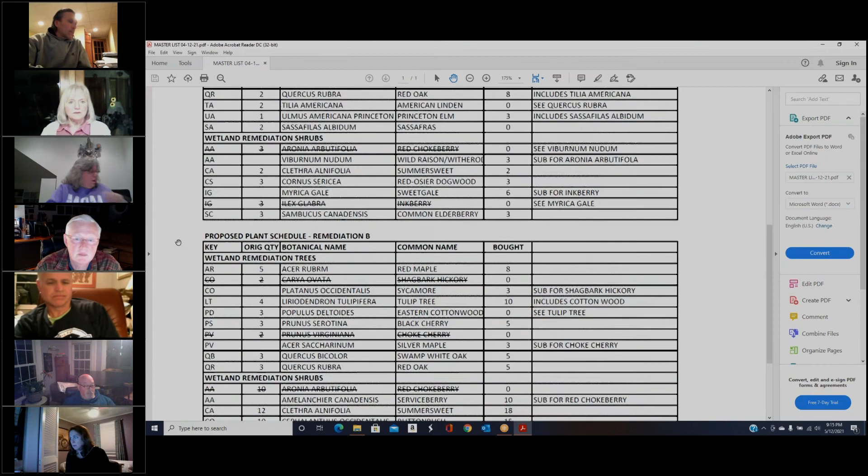There's a lot of other pictures in that packet too that you included, Denise. Can you explain what they are? Oh, well, I took a lot of photos of the area, so hold on, I gotta get to my packet. You think that pathway was that wide that went between 5 Victoria and 4 Main? I was out there before any planting was done, and no material was added to that area. So the water level may just be a little bit lower, so it looks a little bit wider, but nothing changed there.

Yeah. Some of the other photos I took were areas of debris in the soils. So some of the piles are showing that there's rock debris. There was still some foreign material pulled out. They were pulling out clumps of clay and wire from previously dumped plant material from the activities prior.

And there was one area where they had excavated a hole. I'm not really sure if that's part of the next phase, but since I was walking in the area, I was documenting the areas, and that might be part of the next phase. Okay, because they do have an active permit for construction. Yeah, I don't know whether they've had the pre-construction meeting, if all the paperwork's in place. And yeah, I can't even talk tonight.

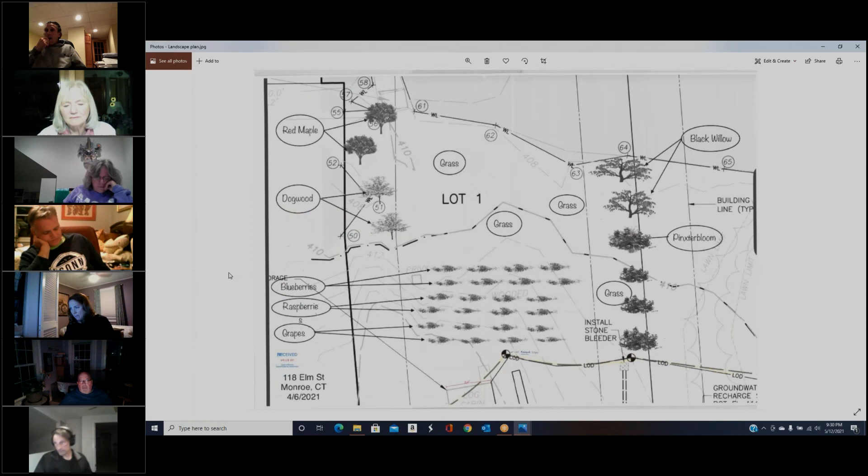It's true that I made the plan from home because it was freezing at that time, and I didn't even want to pull in there because there was like 3 feet of snow. But now that I look at it, there's already trees there, even where I put them on the plan. So I think I have to adjust that a little bit and move trees more to the center area, or closer down towards the water, or add some more. Yeah, because the whole concept was to naturalize the whole back end toward the lake. There's nothing wrong with having a pathway so that you can get to it. But the open grass concept is not really what we're looking for, especially there. All right.

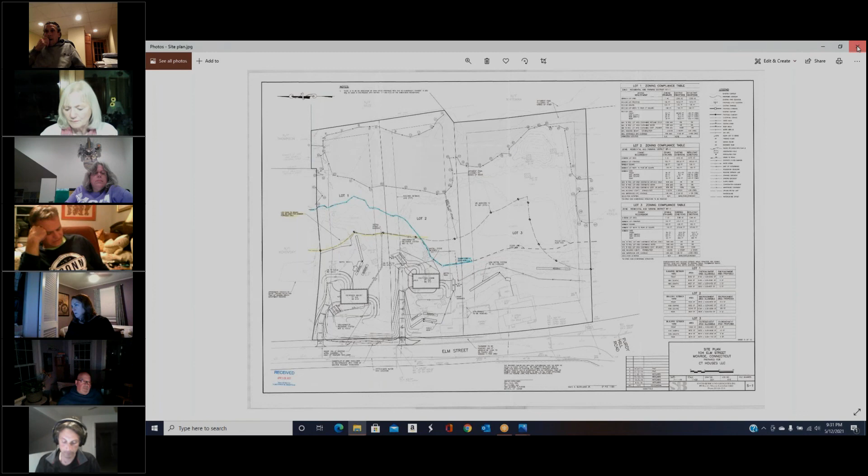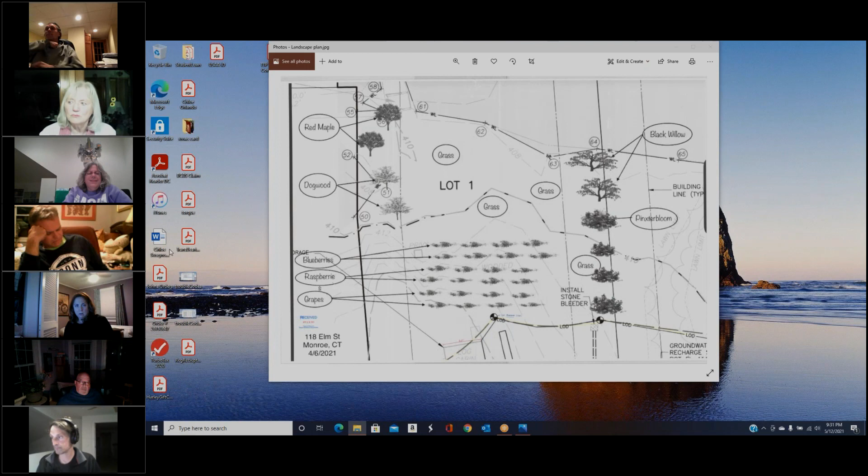I don't know how to proceed from here. If you'd like, I can take that plan and clear it, then put the existing trees that are there now on the plan in one color to identify them, and then add the other trees where I can plant them. Okay, when you put them on the plan, try to make their size as real as possible, because sometimes people will represent a 1-inch caliper tree as having a 20-foot canopy, which it doesn't have. Right. Okay.

So are you there a lot? No, not really. Is there anybody living there yet? No, nobody lives there. Would you mind if the commission stopped by at their leisure to take a look? Yeah, that's fine. No problem. Okay. So we'll add that to our list, and we'll look forward to your new plan and take a look in the meantime.

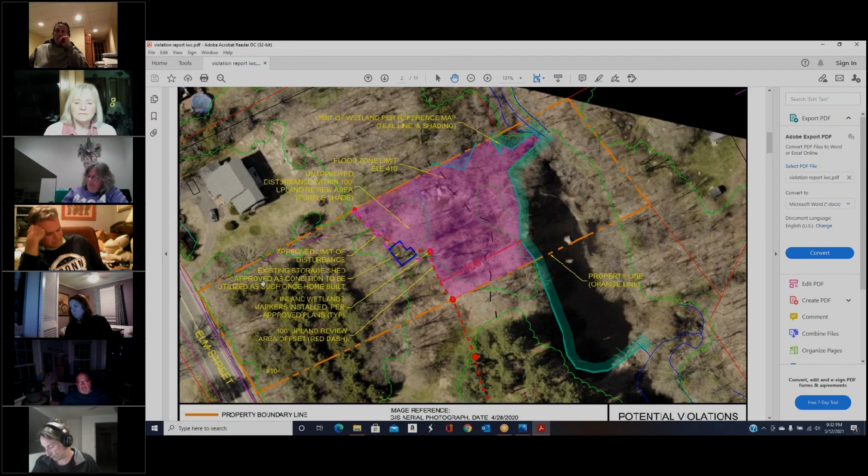Yeah, and I'll move the little boat out of there tomorrow. I'll bring it over to my parents. And I moved that big pile of wood today. Okay. I'm sorry, go ahead. No, I was just saying I moved the wood today. It was a good day for it.

What kind of activity is going on in the little shed? I just have some tools stored there, like a weed whacker, and basically gardening tools, that kind of stuff. Can I ask what the coolers are all about? Just while I go there and work, I had some water or a beer. That's all.

Okay, in the chimney? Yep. That was existing. Yep. Wow. Okay. All right. Yeah. It's actually pretty nice. It's all wood paneled, like cedar walls in there. It's got some nice wood floors. I mean, they did a nice job with it.

Apparently, I heard that the son-in-law of the family of that house on lot 1, years ago, he built that house, the shed or cabin, and him and his wife lived there. Oh, wow. That poor guy. That's what I hear from the neighbors. Those are the stories that I'm hearing.

Okay. All righty. So if you would please, as soon as you can, get that new plan put together and submit it to Denise, preferably, because she knows what's going on. And her time with us is limited, so we don't have too much time and flexibility. But if you could get that new plan together, and if the commissioners could walk it in the meantime, then we'd all be a lot more educated. Sounds good to me. Thank you very much.

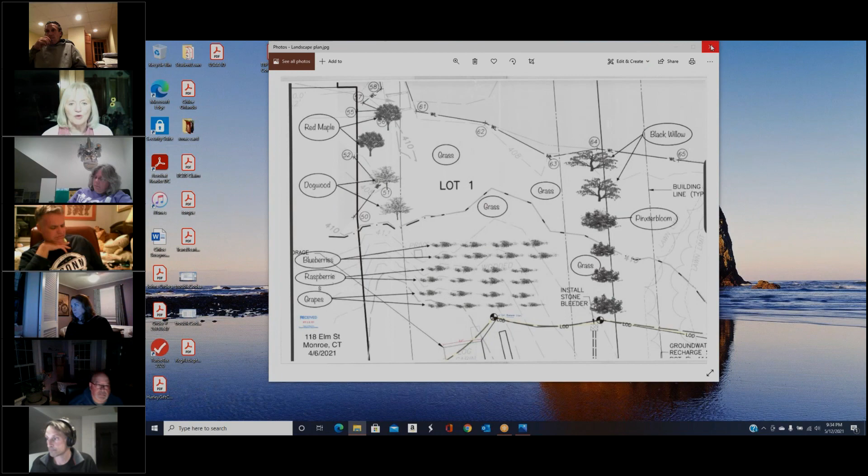Appreciate it. Do commissioners have any comments? Or Denise? I don't. No comments. Nobody else? Steve? Clark? I'm good. Okay. So please try to walk that before the next meeting. It's a quick stop. It's right off the road. You just pop in at your convenience. Okay, thank you very much. And if you guys want me to meet you there, just give me a call. I'm working pretty close in Fairfield, and I live in Shelton, so I can just shoot over there anytime.

You have my number, right? I'll provide it to the commission. I'll send it out to them. Okay. Sounds good. Thank you very much for calling in. Thank you so much for attending my case. I'll work on that new plan in the next couple of days. Thank you. All right. Bye now.

Okay, next we have the minutes, which have been tabled, and Regulation Amendment Committee. I have to admit I didn't get the other definition for native plant. Been a little busy. What's the next step? What do we do at this point? Once we get them all listed, Donna, do you get them all compiled, send them to us, and then we vote? Yeah, that's essentially what's supposed to happen. How quickly did you want that done?